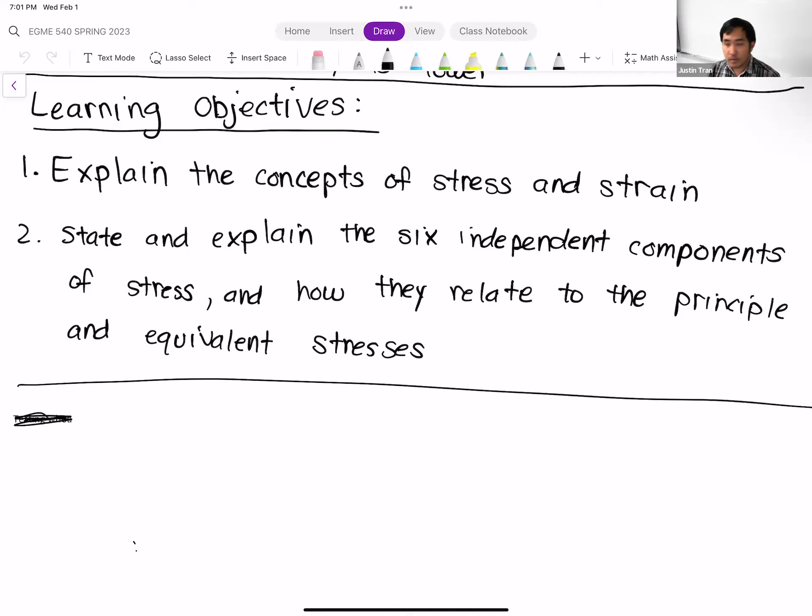Are there any questions I can answer about the activity or about anything before we get started for today? Okay, all right, so let's go ahead and get started. The topic for today is a strength of materials review.

Strength of materials, if you did your undergraduate in mechanical engineering, you most definitely took a course in this. If I could sum up strength of materials in one word, it's basically the theory, or the concepts of how objects and structures mechanically deform when they're exposed to physical loads.

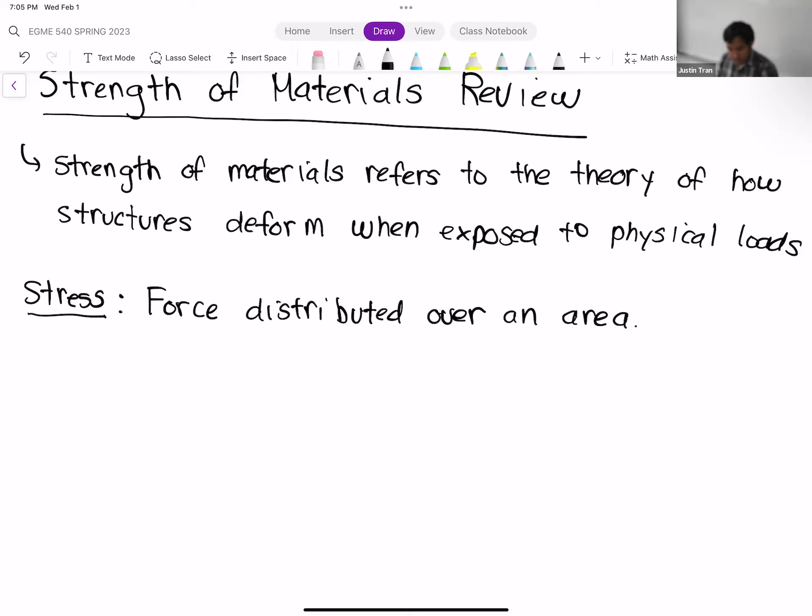Its pure definition for stress is basically a force that's distributed over an area. A lot of times we may have a structure - we have an arbitrary potato here - and a stress may be a force that's being applied to that area. The units of stress, just like its definition implies, is a force divided by an area.

In SI units, the SI unit for force is a Newton, and the SI unit for area is meter squared. So this has units of Pascal - that is the SI unit for pressure, or rather the SI unit for stress. In English units, often we use pound per inch squared.

English units: pound per inch squared, oftentimes reported as PSI, where PSI stands for pounds per square inch.

You might see variations on this. For the SI unit, 1 Pascal is very, very small, so you may see it in terms of kilopascals (kPa) or megapascals (MPa), and so on.

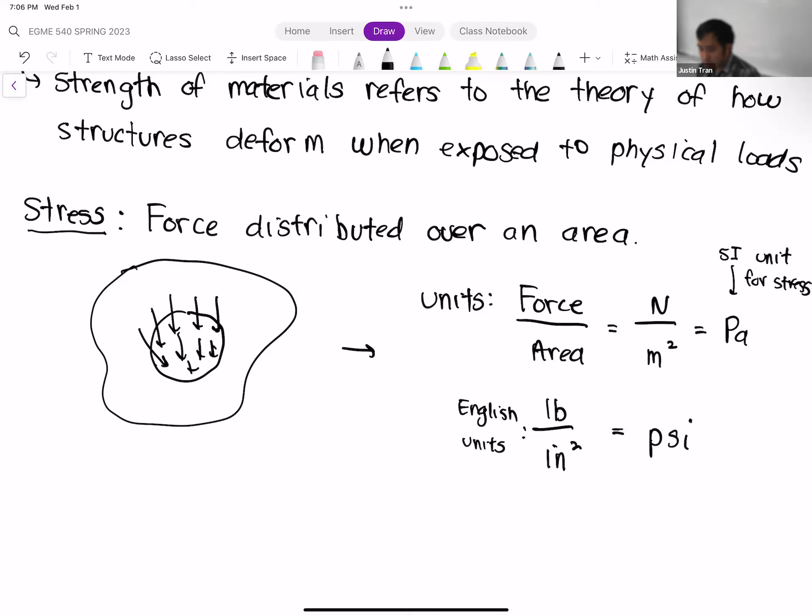If you're familiar with fluid mechanics, you'll recognize right away that the units for stress are exactly the same as the units for pressure.

So you may be wondering, why do we have two different names for it? Why do we have pressure and stress if they have the exact same units? Well, it's true they have the same units, but the way we interpret them is a little bit different. There's just a nuance in how you use those terms.

Oftentimes when we use the term pressure, we refer to something active—something is exerting a pressure.

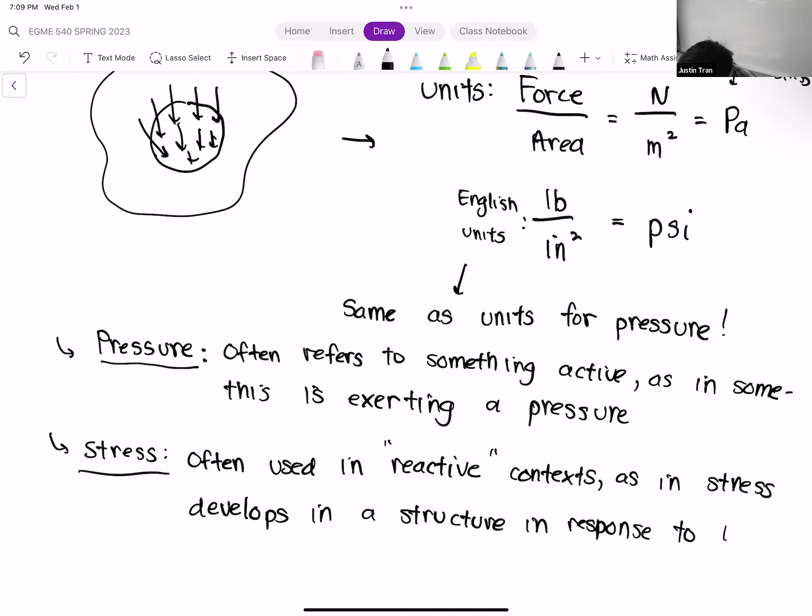Even though pressure and stress often have the same units, we use them in slightly different contexts. You'll never hear people say, talking about a structural beam, that pressure developed inside the beam—that's not quite right. We say that stress develops in the beam.

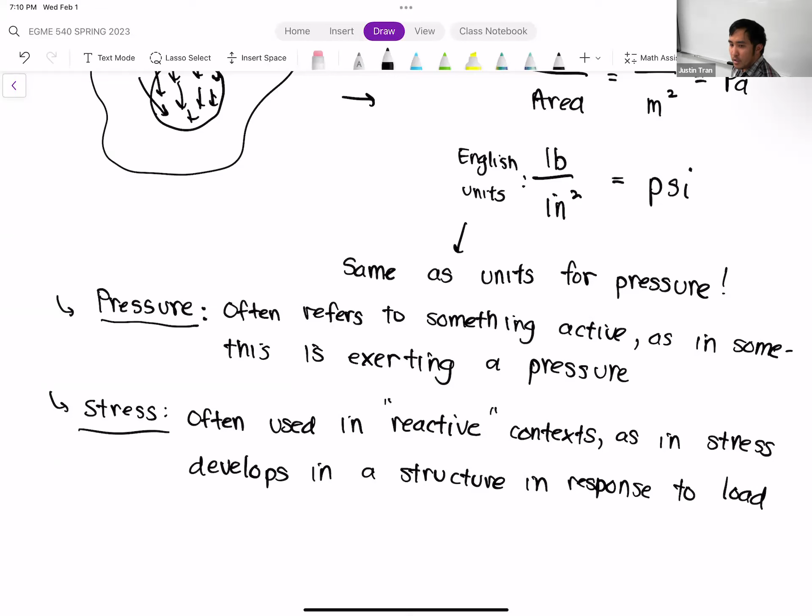When you're talking about forces, sometimes you might use the term stress—you can say something's applying a shear stress onto an object—but most of the time people use pressure in that context. There are more differences between the two, but I wanted to highlight the more common ones here.

Any questions on this? Based on these definitions, you can see what stress is in the context we're using. Oftentimes we say that stress develops inside a structure in response to a physical load.

The reason this happens is that, if you think about our ANSYS simulations in particular, the stress develops inside the structures to maintain a sense of equilibrium—basically static equilibrium.

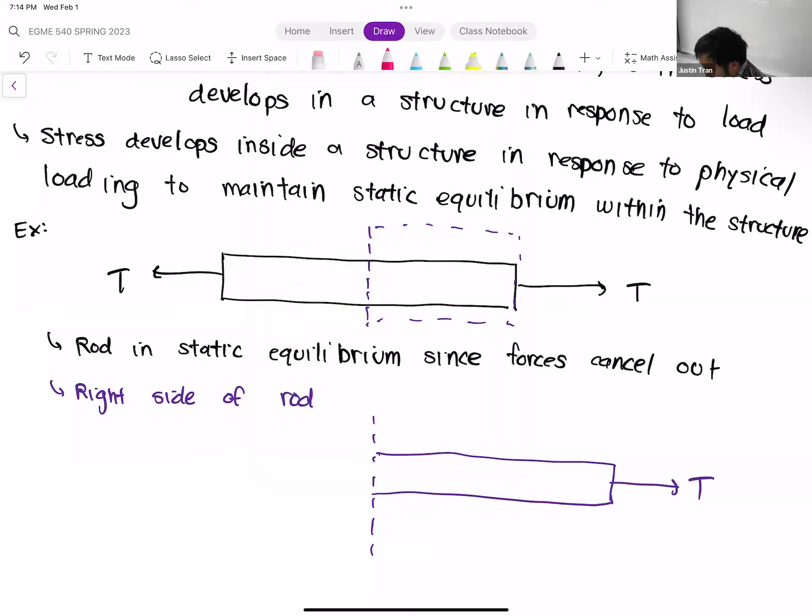The way I've drawn this, there's no way for this rod to be in equilibrium, because the other opposing force is applied on the other side. This implies that on the inside of this rod, there is an opposing internal force that has to oppose that external force.

That internal force, the way that we often describe it, is as being distributed on the interior of the structure. And oftentimes we talk about this force as an internal stress.

The symbol that we give for stress is often the sigma symbol. And this internal stress that must develop has to have a value such that it opposes that external force T.

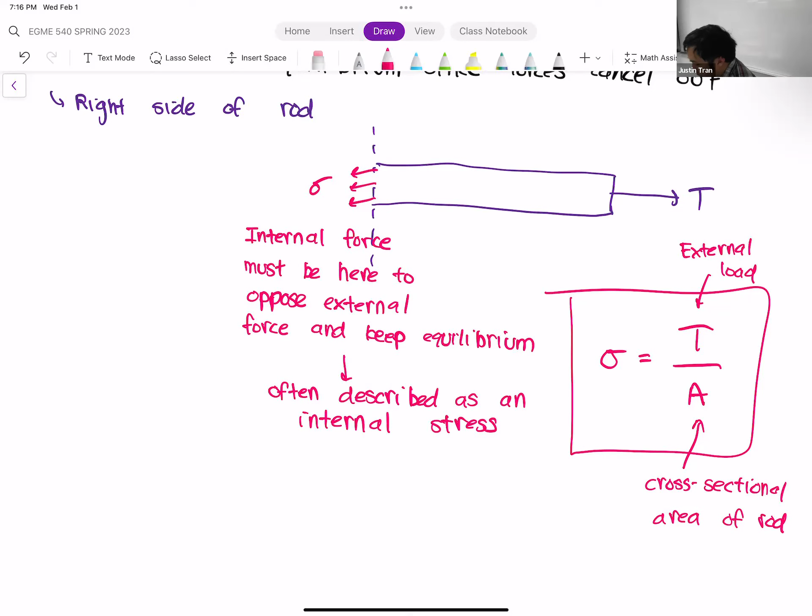So what we say is that internally in the rod, we have an internal stress whose value is T over A. Because if you take the stress and multiply it by A, sigma times A, going back to the formula, that sigma times A is going to be equal to T. So the total amount of force used to oppose the external force has a value of T, and so we have T canceling out with T, and then we have static equilibrium again. So this formula, very simple, but this is kind of the concept of stress in a one-dimensional environment.

Questions on this so far?

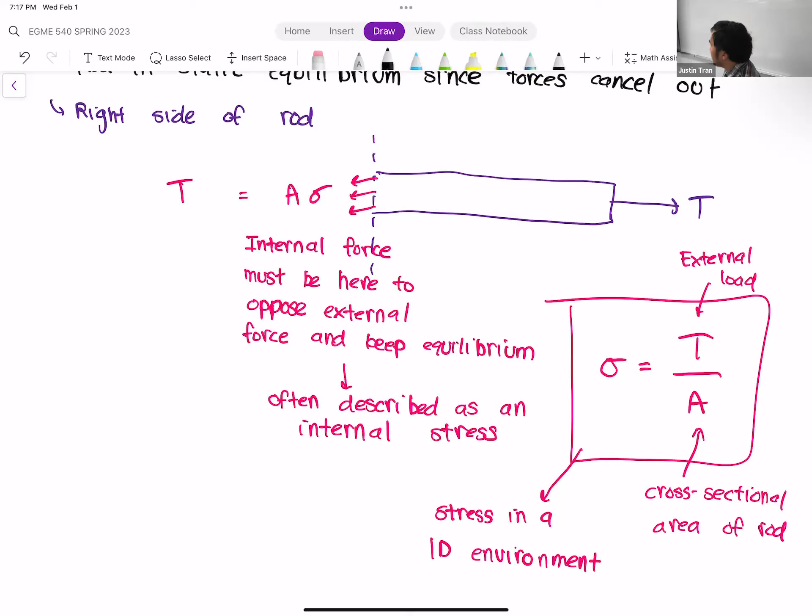And so, of course, in one dimension we can come up with a very easy, very simple formula for stress like this. Once you start getting into 2D and 3D and complicated geometries, the equation for stress becomes a lot more complicated.

We don't really have straightforward formulas that can compute stress in those kinds of geometries. But that's the reason we have FEA, right? We want to know these stresses because they lead to a lot of other things we'll talk about, like failure and strains. But we don't have a straightforward formula to compute it. So one of the big benefits of FEA is that we can compute these internal stresses, these internal forces, without having to do very expensive and very complicated experiments.

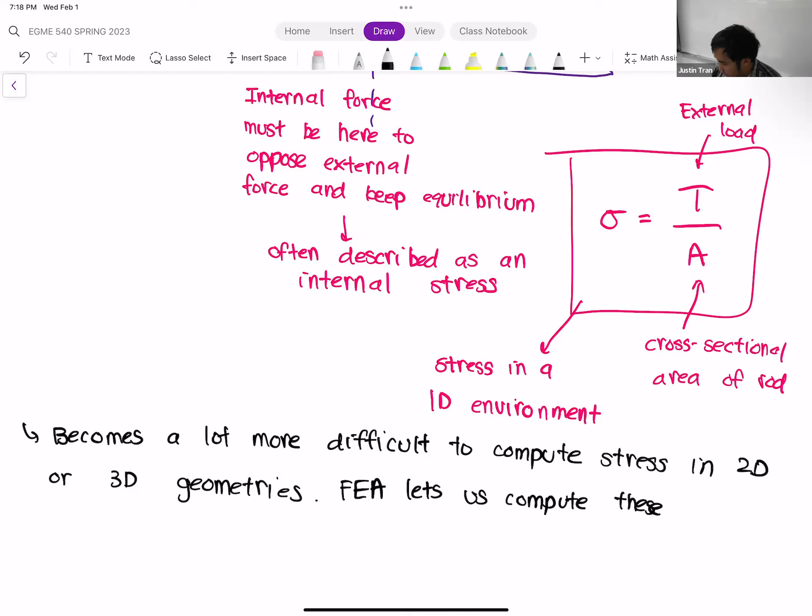All right, so that's kind of the concept of stress. That's one thing we're very interested in, because even in a one-dimensional case, even if I took my Apple Pencil right here and pulled on it, that would still be very hard to measure the stress. So stress analysis is one of the primary benefits of doing FEA.

All right, so let's expand on this idea of stress a bit more. The way I drew it here, the stress looks like it's directly opposing that tension, but stress is actually a multi-directional phenomenon. You can have stresses that go in multiple directions.

And in fact, if you were to mathematically describe stress in a three-dimensional object, it's not just a vector quantity. Normally when we think of things occurring in multiple directions, we think of them as a vector quantity, right, X, Y, Z components. Stress is actually a lot more complicated, because not only do we have the three directions, but we also have two different types of stresses as well, which we'll talk about soon. So to really fully describe stress in a three-dimensional object, you need what's called a tensor, and a tensor is just a fancy form for a matrix.

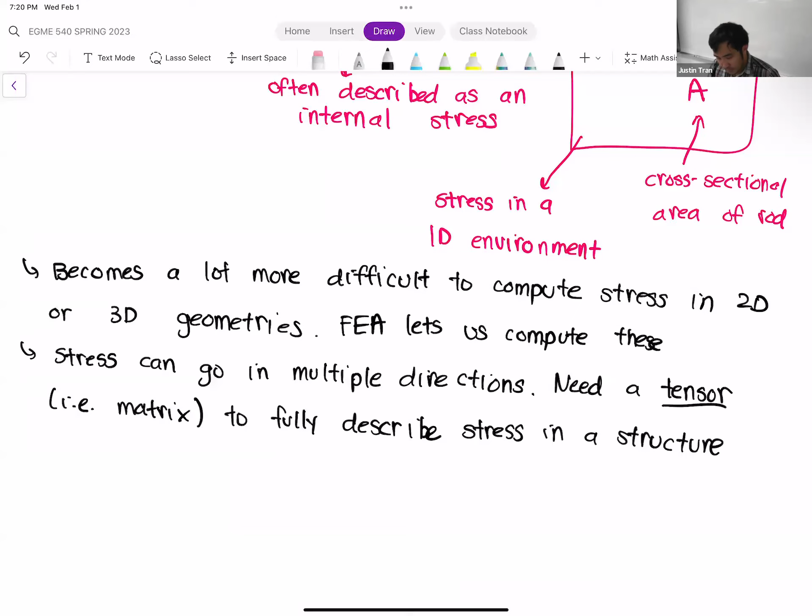And so if you were to mathematically write it out, it would look something like this. So you have stress. You won't see me use this much, since this is as mathematical as this class will get. But when I'm talking about a matrix or a tensor, I like to put an underline on it, so I do an arrow on top for a vector and an underline for a matrix.

So for a three-dimensional case, our stress tensor is 3 by 3. We have sigma xx, sigma yy, sigma zz. Off diagonals, we have tau xy, tau xz, tau yx, tau zx, tau yz, tau zy.

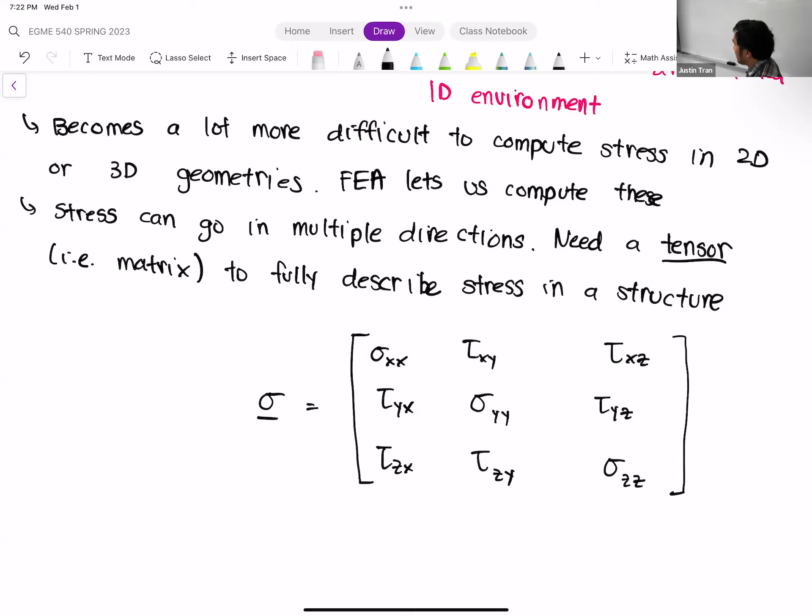You can see it's a lot, and there's a lot that we can describe here. So obviously, if you look at the terms in this matrix, you see X, Y, Z, and that should be one of the first things that stand out. So we have different values of stress based on what direction we're talking about. But you can see here that I've used different symbols as well. On the one hand, I have the sigmas, which is the same symbol for stress that we used before, but we also have all these taus. There's a reason why I gave these different symbols, because they represent different types of stress.

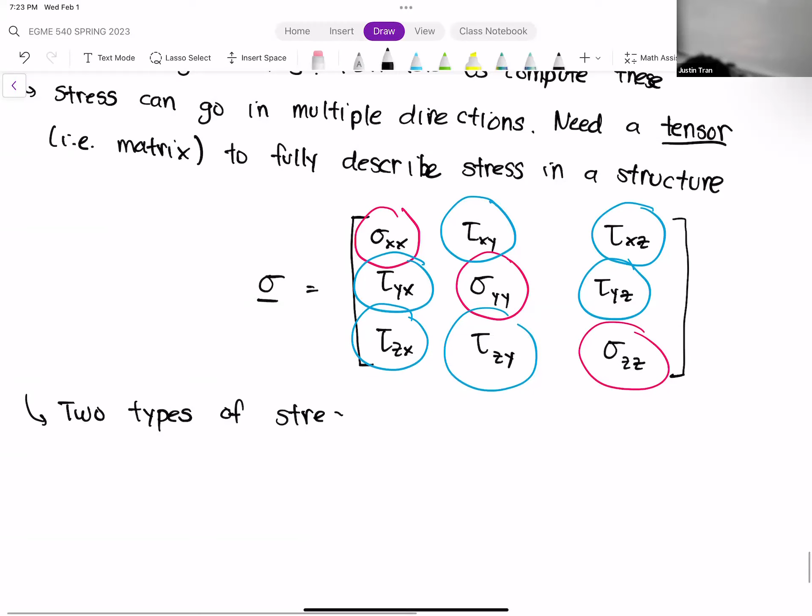So let's talk about the two different types of stress that we have. Okay, on the one hand, let's talk about the sigmas first.

And so the sigmas, I think, are kind of what people mostly associate with this idea of stress. We call those normal stresses. So these are the sigma XX, sigma YY, sigma ZZ.

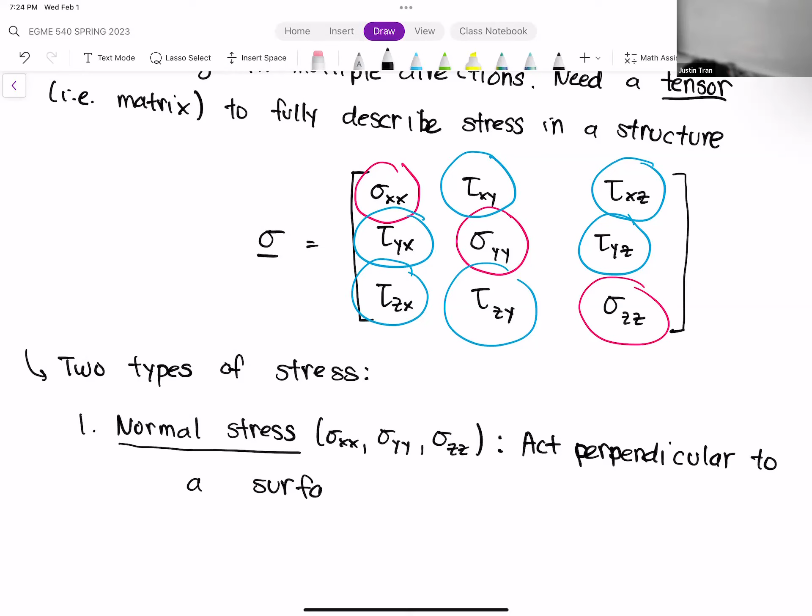And just like its name implies, the normal stresses are ones that act perpendicular to a surface. So visually, they look something like this. In fact, the example that we did above had normal stresses. If we use the dotted line as our surface that we're looking at the stresses for, then the normal stress would act perpendicular to that dotted line. I know I didn't draw those exactly straight, but those purple lines are perpendicular to the dotted line.

All right, the other type of stress that we have are the shear stresses. All the tau symbols are this, so we have tau xy, tau xz, tau yz, etc. The shear stresses are different in that they act parallel to the surface.

So let me go ahead and draw the same thing that we have here. And so the shear stresses, instead of acting perpendicular to that dotted line, it's going to be parallel to it instead. Any questions on this so far?

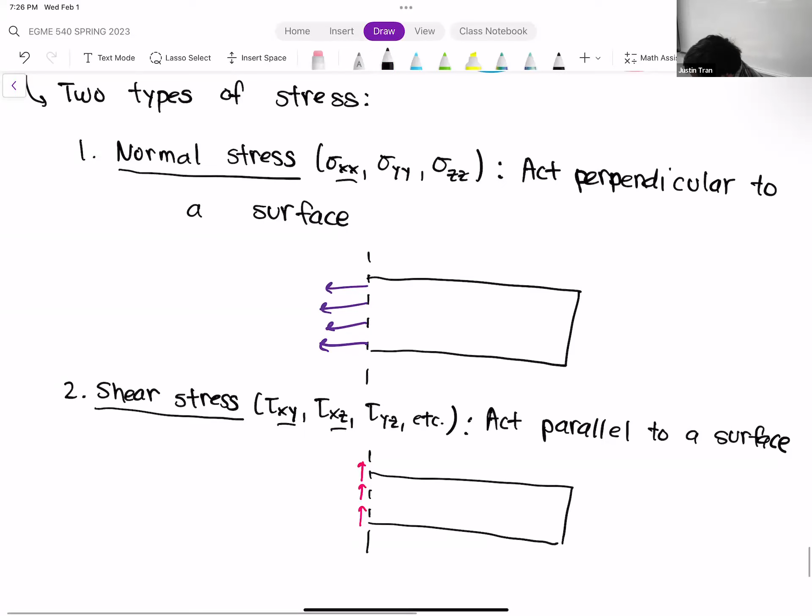So you may be wondering, why, if we have normal stresses and shear stresses, why do we have a double lettering here for the directions? The reason we have the double lettering is that it tells you two pieces of information.

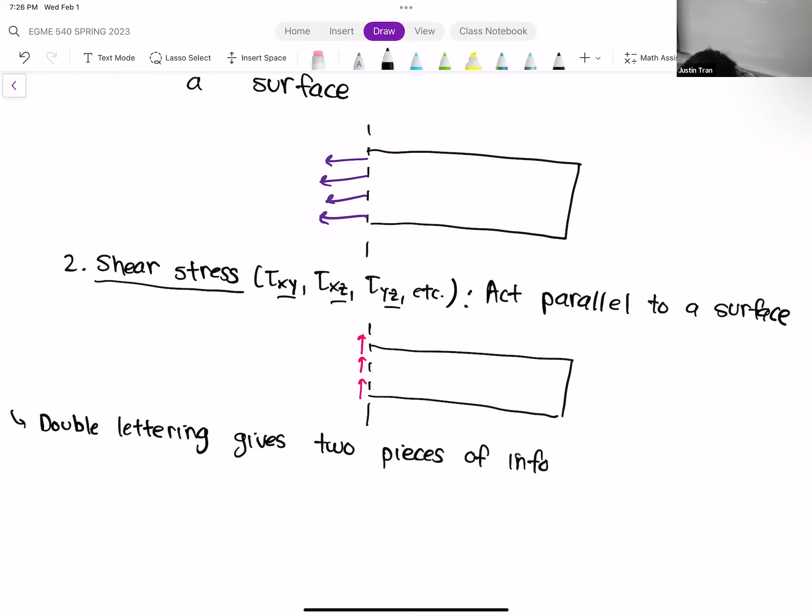And so the first letter tells you which face the stress is acting on, whereas the second letter, the second coordinate, tells you the direction of the stress itself.

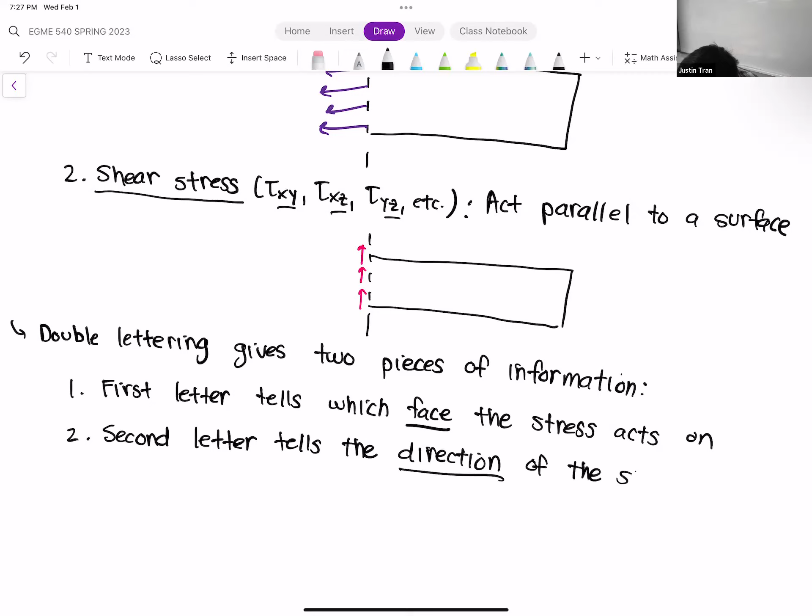All right, let me show you what I mean. Oftentimes when you're talking about stresses in a structure or even a fluid too, if you've taken an advanced course, or even covered in undergrad, in structural mechanics or fluid mechanics, you might be familiar with this figure that I'm about to draw. I don't like drawing it usually because it ends up being kind of a mess, but it's useful to illustrate what's going on.

All right, so we have a cube here. Imagine that this cube is an infinitesimally small cube in a structure, and we're going to use this cube to show you where all the different stress components are acting. So let me draw my coordinate axes here.

And so the x direction we'll say is going to go horizontally from left to right on the page. The y direction is going to go vertically from bottom to up on the page. And the z direction is coming out of the page and going towards you.

All right, and so when I talk about which face the stress acts on, it basically tells you which face on this cube the stress is acting on. And so this face right here, the one that's facing to the right, we call that the X face because if you imagine the face as like a person's face, it's facing in the X direction.

The top part of the box, or the top surface of the box, that is the Y face because that faces in the positive Y direction. And the one that's facing right to us, that's the Z face because that's facing in the Z direction. Okay, and then on each of these faces, we have all the components of the stress.

Oh, really? I see. Well, it's also the second time you're hearing it, so I have the benefit of, usually the second time you hear something, it's easier to understand.

All right, and so for the X face, we have three components of the stress. So we have stress in the X direction, and that's sigma XX. Remember, the normal stresses act perpendicular to a face, and so sigma XX is the force on the X face in the X direction. So that's why it's that one.

Then we have tau XY. So tau xy is a shear stress that's on the x face that goes in the y direction. So it's parallel to that x face.

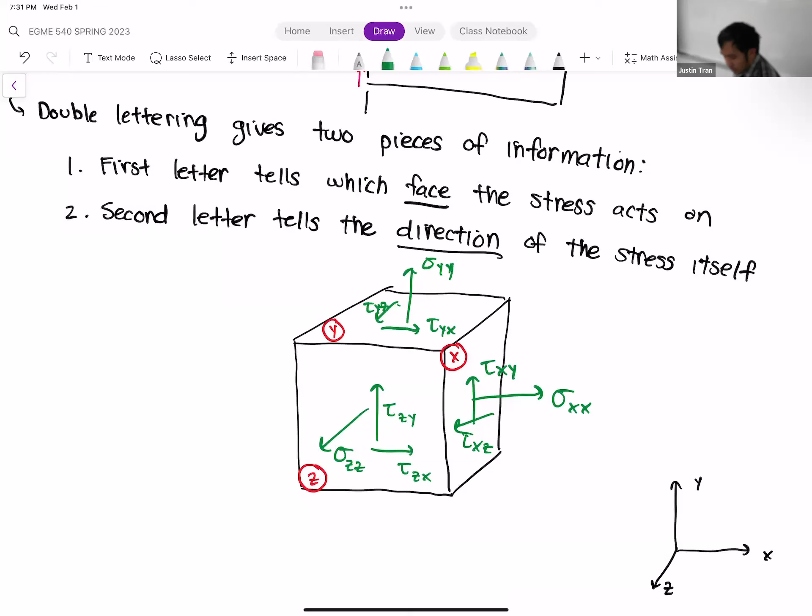All right, any questions on this? Okay, so that's stresses.

So stress is pretty complicated. So when we talk about stresses in a structure, there's a lot to keep in mind. But at the same time, stress is something that is very interesting. And if you're doing structural FEAs, stress is what you're aiming to get, and that's what you want. But as you can see here, with the 9 components of stress, it gets to be pretty complicated.

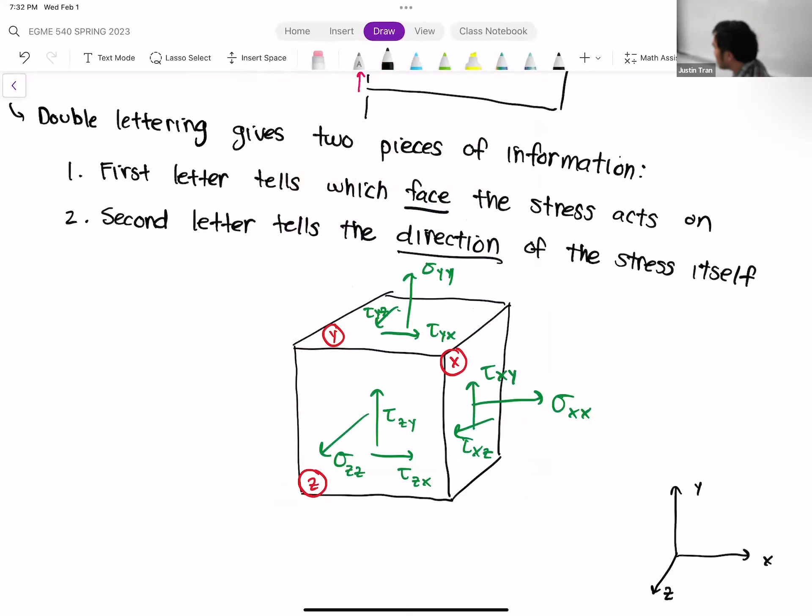And so when you talk about just stress, you have to ask, are you talking about normal stresses? Are you talking about shear stresses? Which direction are the stresses going to go? And so usually just by itself, stress, because stress is so complicated, it becomes kind of hard to talk about stresses in a structure.

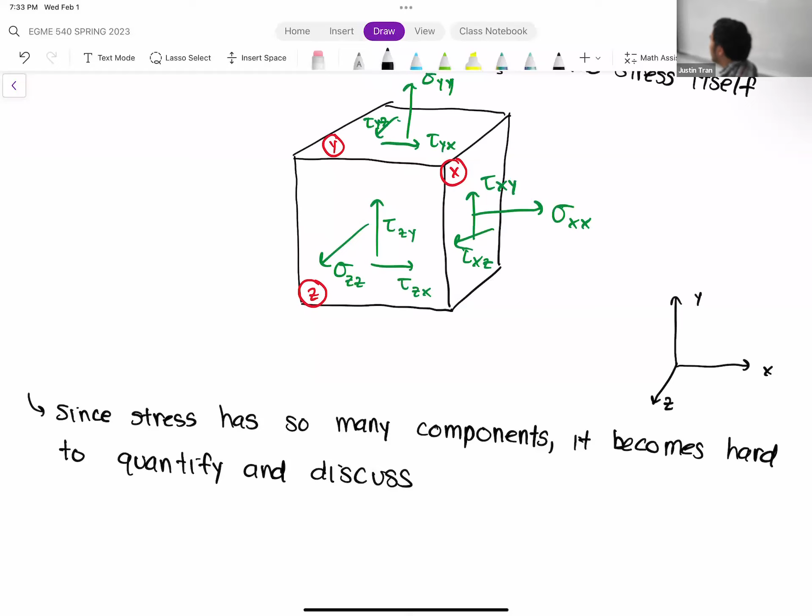So oftentimes, when you talk about stresses, specifically stresses from a finite element simulation, remember finite element simulations, we're often doing these on very complicated geometries. And so we're looking at a complicated geometry and this complicated idea of stress, which makes it even more difficult. And so instead of talking about the individual stress components, oftentimes we like to come up with other measures of stress that are more easy to interpret.

All right, and so this is where the concept of an equivalent stress and a principal stress come into play. Equivalent and principal stress, they're computed based on the same stress tensor, and so all the components of stress are there. It's just that we kind of run it through an additional layer of processing just to make it easier to interpret.

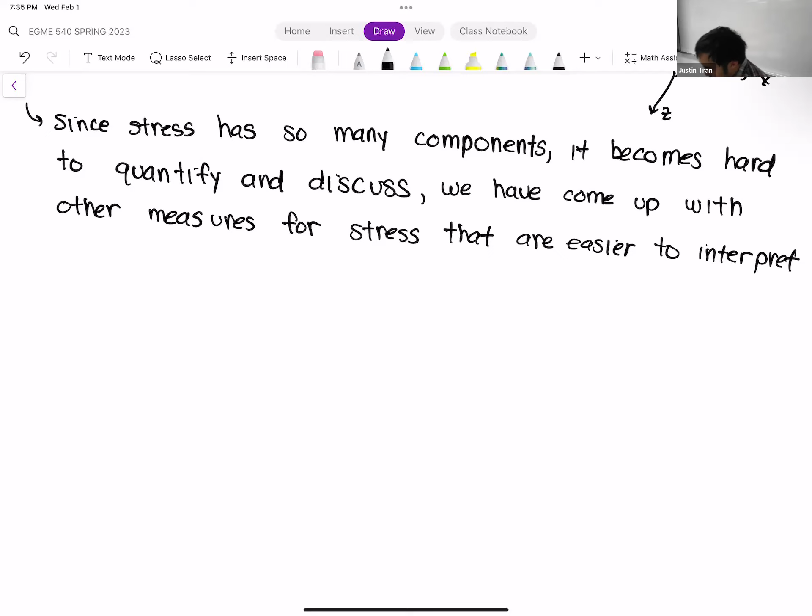Okay, and so, of course, there are more interpretations of stress out there. So there's not just equivalent stress and principal stress. It's just that these are kind of the more common ones, so these are the ones that we talk about a lot in this class. Okay, so let's talk about equivalent stress first.

And so I think in ANSYS it calls it the von Mises stress. Still don't know if that's how you actually pronounce his name, because I've heard equal amounts of people say von Mises, and so, I don't know, maybe we'll dig up, or maybe when I die and go to heaven, I'll ask what's the proper way to pronounce his name.

Okay, and so the idea about the von Mises stress is that it takes this complicated tensor for stress and turns it into a scalar value, because oftentimes it's a lot easier to think about scalar values when you're comparing things. You can almost think of it as the same way as taking the magnitude of a vector.

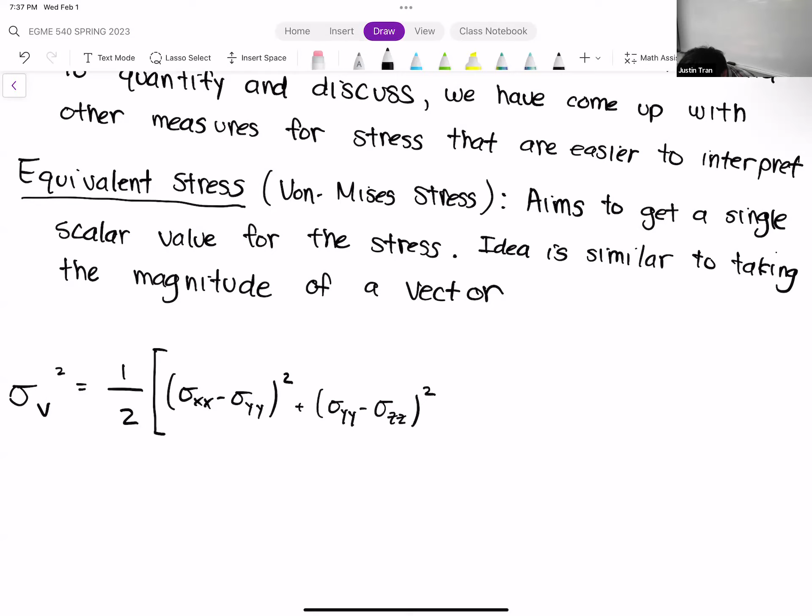Okay, so the formula for this is 1/2, and then we multiply this by the quantity sigma xx minus sigma yy, quantity squared, plus sigma yy minus sigma zz, quantity squared, plus sigma zz minus sigma xx, quantity squared, plus 6 times tau xy squared plus tau xz squared plus tau yz squared.

Six. Yes, that's 6 right here. So like literally the number 6.

All right, so if you look at this formula, you can see that it takes basically all the stress components into consideration. Okay, so of course here you have all the normal stresses, and here you have the shear stresses. You may look at this and say, hey, we only have half the shear stresses, right? There should be 6 of them, but I only see 3 in this formula here.

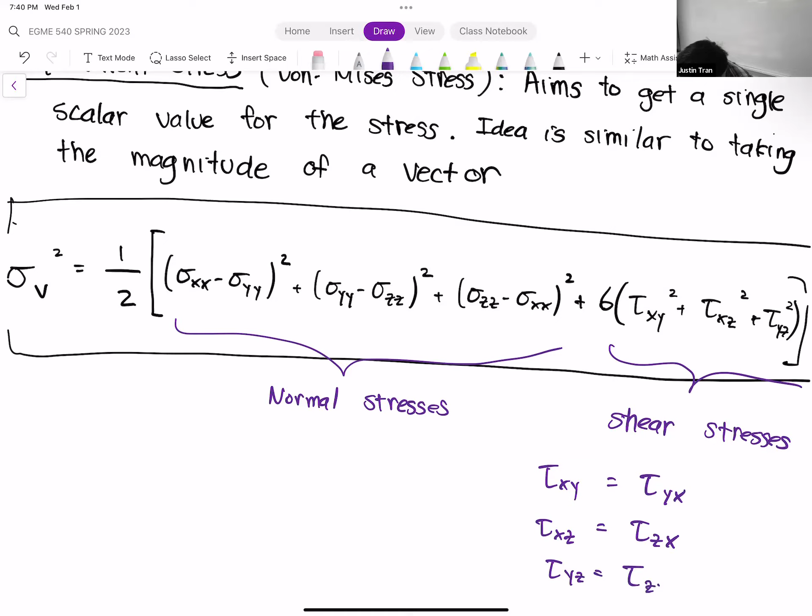The reason for that is that the stress tensor is a symmetric tensor. And so if you kind of swap the letters, then you end up with the same thing. So tau xy is equal to tau yx, tau xz is equal to tau zx, and tau yz is equal to tau zy. These are basically saying the stress tensor is symmetric.

So that's why it may seem like there's only half of the shear stresses represented in this formula. The reason for that is just that it's symmetric, and so you really only need just one of them, and then you just multiply it by 2, basically. So that's where the 6 kind of comes from.

All right, so the von Mises stress, very, very popular. I would say this is the one I kind of see the most because it's a scalar representation, and it's kind of easy to interpret.

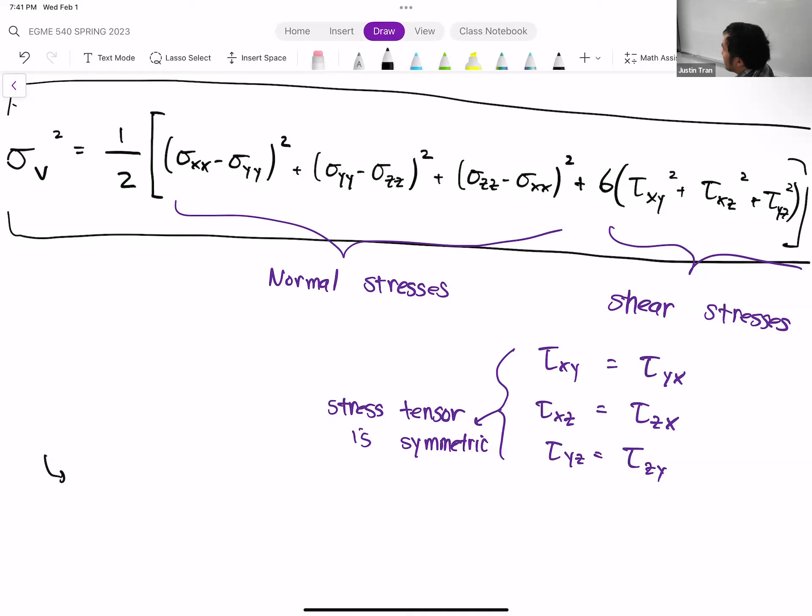And so, if you look at this formula here, you can almost think of it as the magnitude of stress. You take all the components together, you get one number, and that's just how much stress it's feeling. There's been a lot of theory built around this idea of von Mises stress, and one thing we'll use a lot in this class is failure testing for material failure.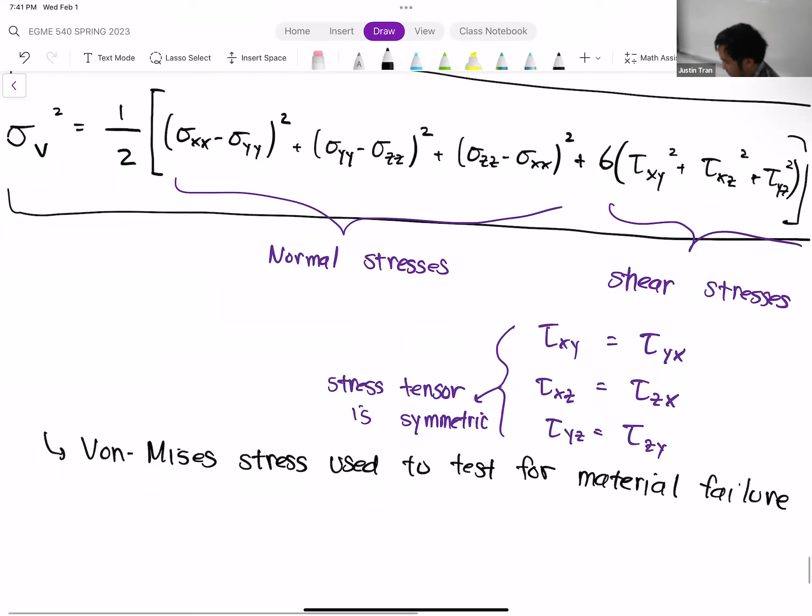And you'll see this in activity 2, a week from today. A lot of times, when you look at the material data sheet for a material, let's say aluminum, steel, or something like that, they often will report something called a yield strength, or a strength of a material.

And so the idea with the yield strength is, if you look at the units, the units for yield strength are the same as stress, given in Pascal, megapascal, PSI, things like that. And so the idea with the yield strength is that if the von Mises stress in the material exceeds this yield strength, then the material will start to break.

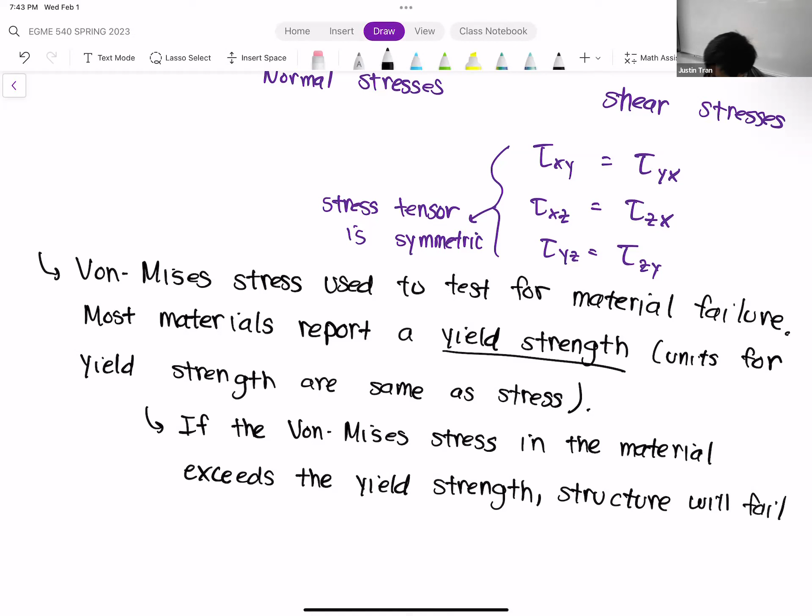So that's known as the von Mises failure criterion.

It's not always going to be as straightforward as this. Sometimes if you look up a material, they'll have different yield strengths that they report. They may have a compressive yield strength, a tensile yield strength, or a shear yield strength. In those cases, you'd have to look at the individual normal stresses and shear stresses to determine that. But oftentimes, if you look up a material and it just gives you one number, one yield strength, you're meant to compare that to the von Mises stress, which is a scalar representation of that stress.

And so in activity 2, I'll give you a short preview: we're basically going to be testing for failure in a bike crank geometry.

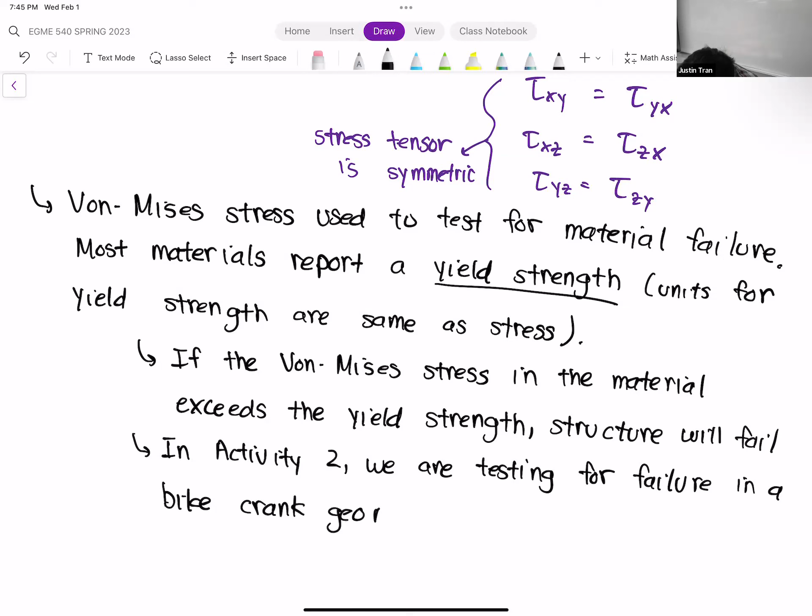Basically what we're going to do is I'm going to give you a CAD file for a bike crank, the thing that connects to the pedal, kind of a rod. We're going to apply a load onto that bike crank, measure the von Mises stress, and see if that exceeds the yield strength of that material.

Okay. Any questions on this?

All right, so that's von Mises stress, and again, just think of it as a scalar representation of all the stress components. The other concept of stress that we're going to discuss is principal stresses.

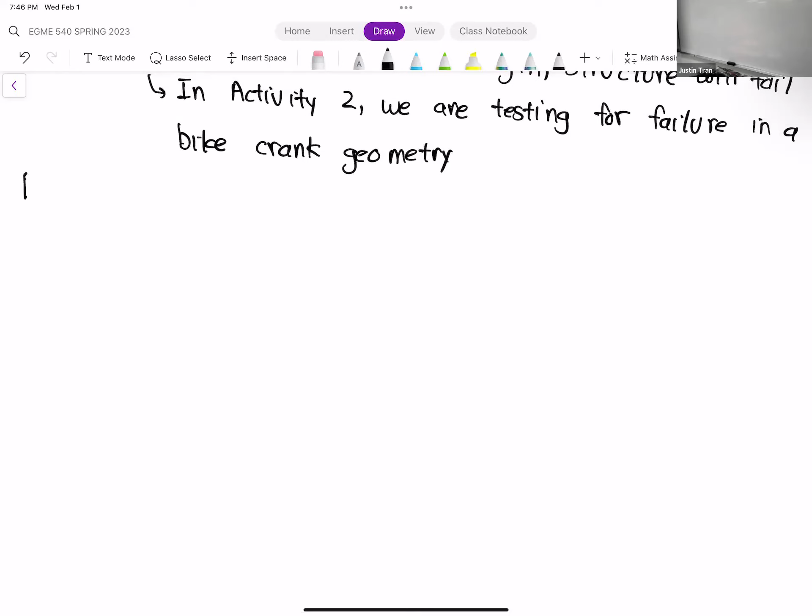So the idea with principal stresses is, the motivation is similar to the von Mises stress, where we want to simplify our interpretation of the stress. It's just that the way we achieve it for the principal stresses is a little bit different.

So for principal stresses, what people were saying is that this idea of a stress tensor having 9 components of stress, 6 unique components, is too many components to keep track of. Instead of transforming the state of stress into a scalar, principal stress aims to turn the interpretation into a vector instead.

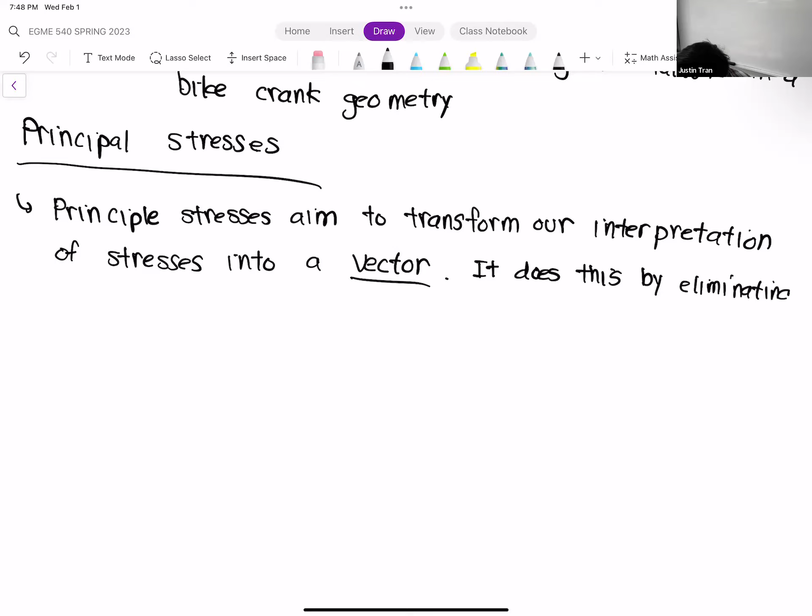So how does it do that? If you have a normal situation, I'm going to do a 2D case here so it's easier to draw. If you have a two-dimensional square, normally we have the normal stresses: sigma yy, sigma xx.

Then we have the shear stresses: tau xy, tau yx, tau xy.

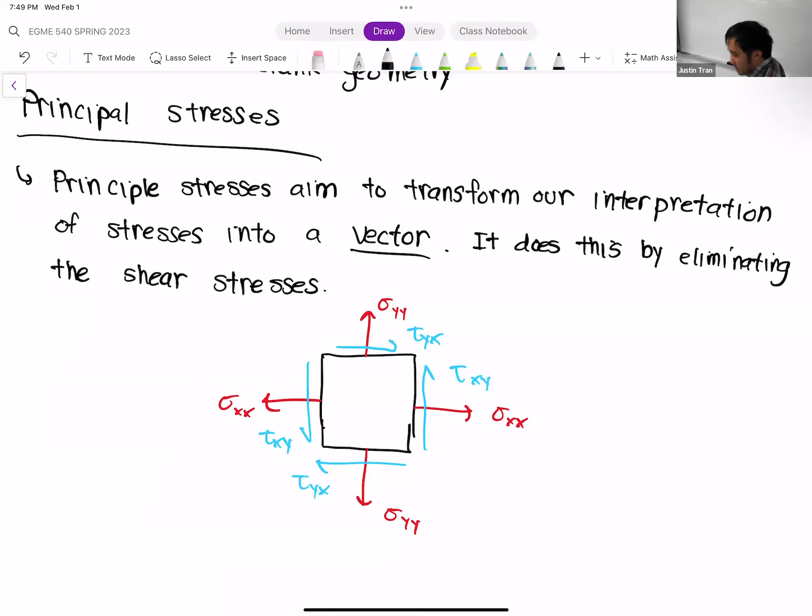What some people noticed, I think it was a math person, because otherwise it'd be really hard to determine this, is that when you have a complicated stress situation with both normal and shear stresses, what you can do is perform a change of coordinates. Instead of looking at this square as being lined up with the x and y axis, we can rotate the square.

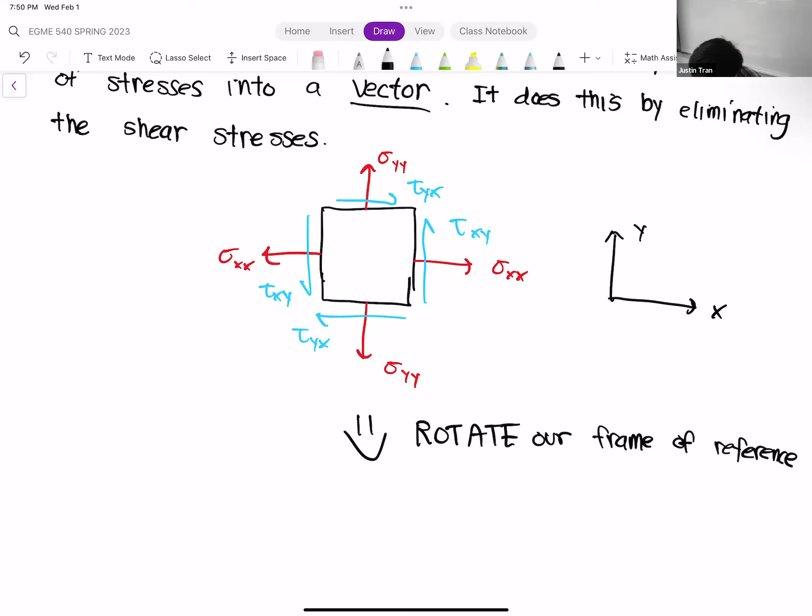So instead of the x and y components being like this, you rotate it so that the x and y coordinates are in a different direction. We'll call it x prime, y prime. And then our square is going to be like that as well.

So why would you do this? Why would you rotate your frame of reference? The idea with the principal stress is that if you rotate your frame of reference in a very specific way, you can get it so that your shear stresses are basically zero, and you change the interpretation of the stress to be only normal stresses.

It's important to stress here that by doing this rotation, we're not introducing stress or taking stress away. The overall magnitude of the stress is still the same. It's just that we're changing our perspective, rotating it a bit to make it align more conveniently in terms of computations.

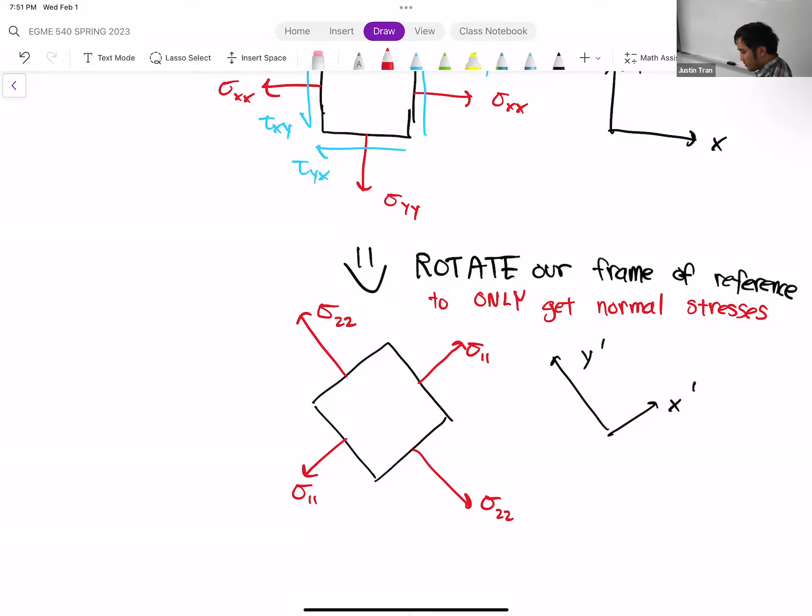If you took the von Mises stress of the top configuration and the bottom one, you should get exactly the same thing. We're just shifting the numbers around and shifting the coordinate axes so that we get it to only this normal state.

So this state right here is really nice, because now if you think of a three-dimensional situation, you only have three components of the principal stresses.

So what do we call these three components? We call them literally the maximum principal stress, the minimum principal stress, and the middle principal stress.

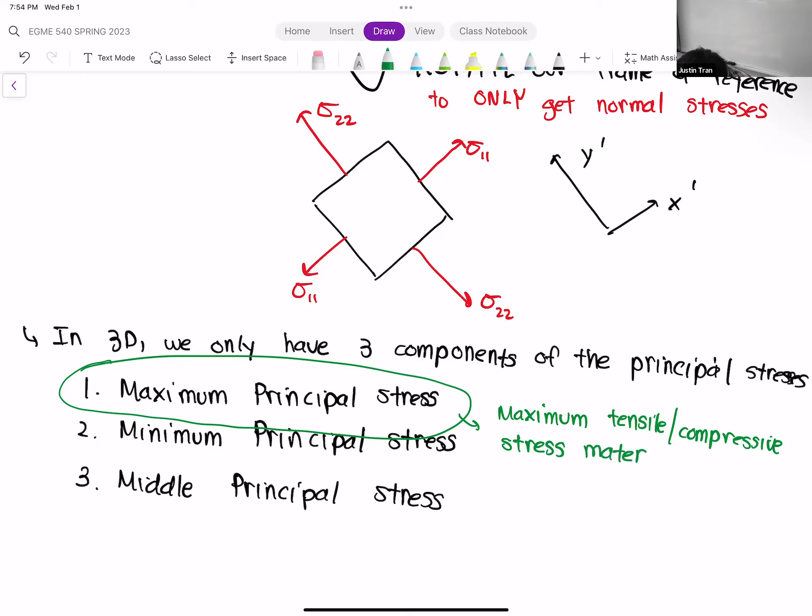This is useful for testing if your material is going to fail, because sometimes when you read a material data sheet, you're given things like the maximum tensile strength or maximum compressive strength. In those cases, it may be useful to compute the maximum principal stress and compare that to the tensile or compressive strength.

This is another really nice feature in ANSYS. Just as trivia, in order to compute this rotation angle and the directions of the principal stresses, that's normally very computationally intensive. You have to solve what's called an eigenvalue problem at each location within your solid, which is very difficult. If you've taken an advanced math course and know a bit about eigenvalues, they are a pain to compute. So it's really nice that ANSYS computes these for you.

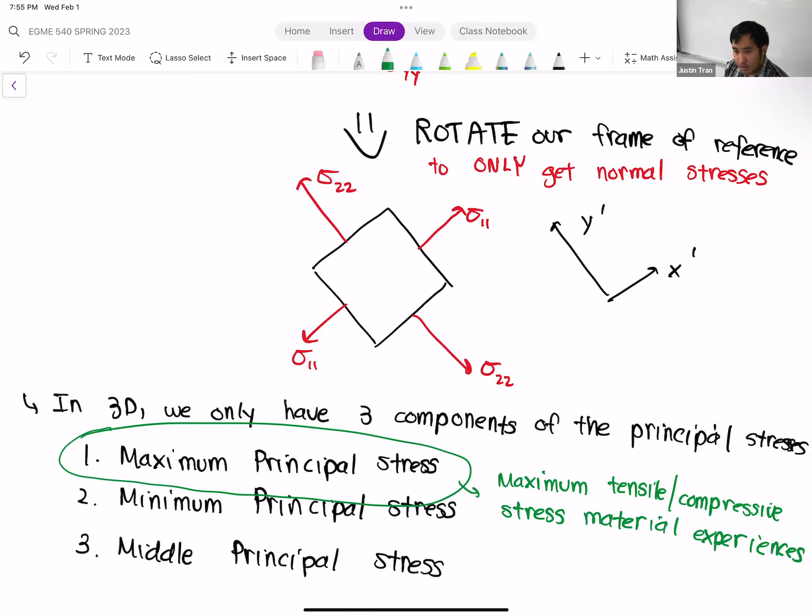It gives you this information basically for free. Any questions on this? Okay, so that's the concept of stresses, and hopefully that gives a little more context in terms of what we're getting out of our ANSYS simulations.

The last thing I want to talk about today is this idea of strain, what strain is, and then how stress and strain are related in a material. So what is strain? Strain is a measure of the amount of deformation, the amount of relative deformation that a structure will undergo.

So you have a structure, you expose it to some loads, to some constraints, it deforms. One way that you can describe the deformation is in terms of strain. Strain is unitless, it doesn't have any units.

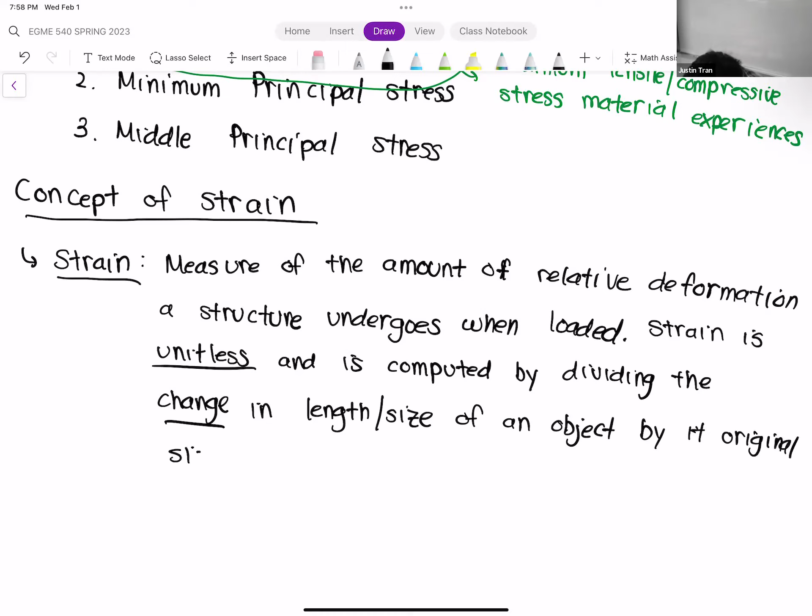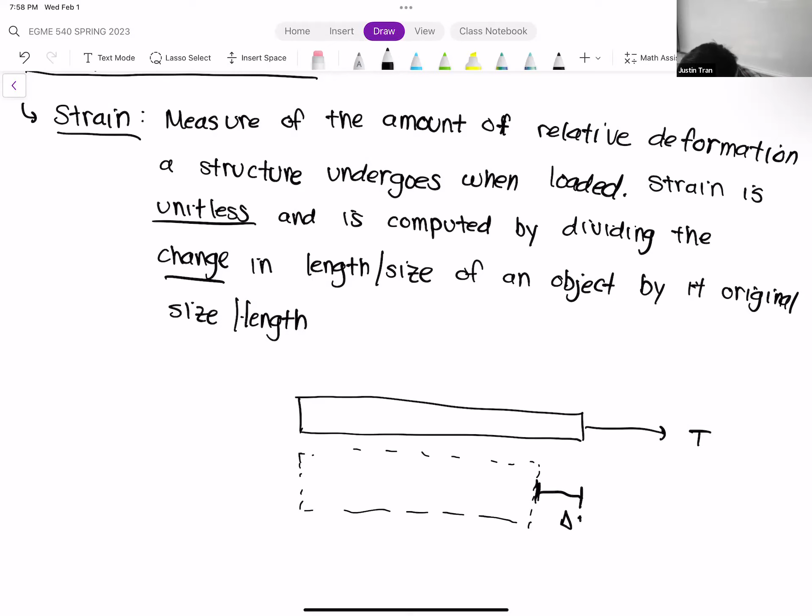In 1D is kind of the most traditional way that it's computed. We have a rod, let's say we're pulling on it with tension T. The original rod may be this length. This distance right here is the change in length, so we'll call that delta L. If the original length of the rod was L, then the strain, which we often give the symbol epsilon, is just the ratio of the change in length, delta L, over L.

Fairly straightforward, you've probably seen strain a million times. But the reason I'm bringing strain up is that when you compute strain, the amount of strain you get is directly proportional to the amount of stress that's within the material as well.

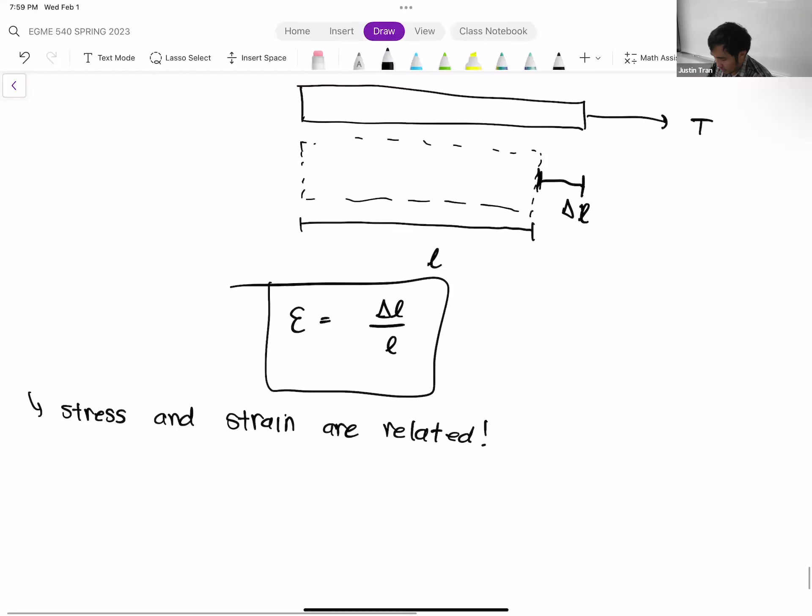In the simplest of cases, for a linear material, we have a linear relationship between stress and strain, and so we have this formula. Sometimes people call it Hooke's law: stress is equal to big E times the strain.

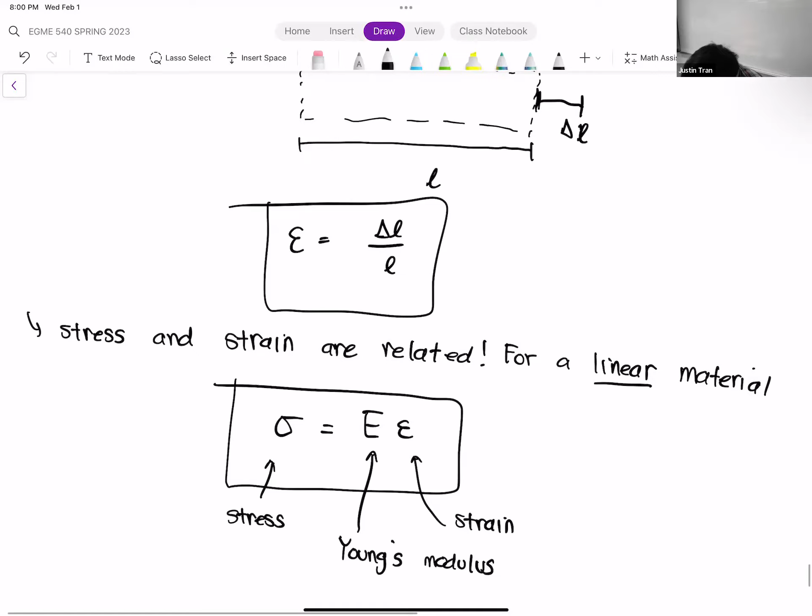This big E here is known as the Young's modulus. The Young's modulus is an important property of the material. We'll talk a lot more about material properties in a couple of weeks. But basically, the Young's modulus describes how stiff the material is, or how well the material can resist deformations when exposed to load.

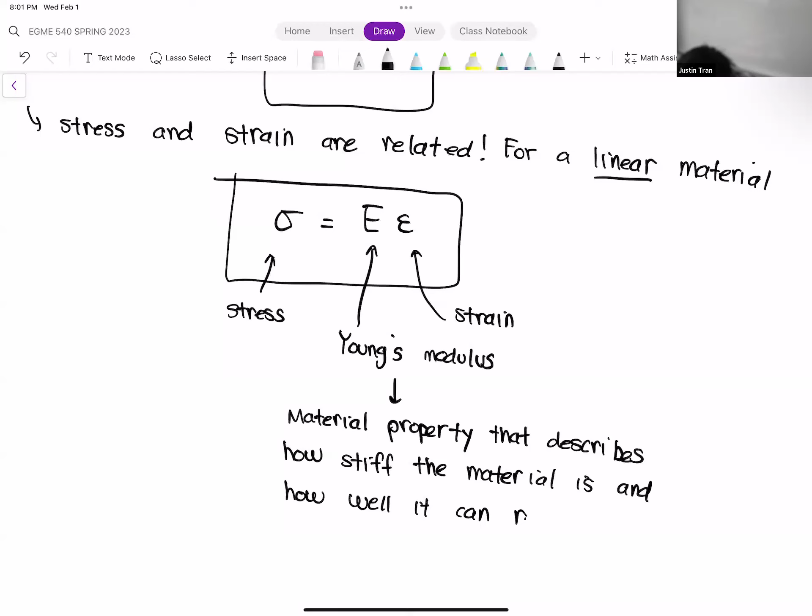Materials with a higher Young's modulus will resist deformations better. In other words, materials with higher Young's modulus will require a higher amount of load or force in order to cause it to deform.

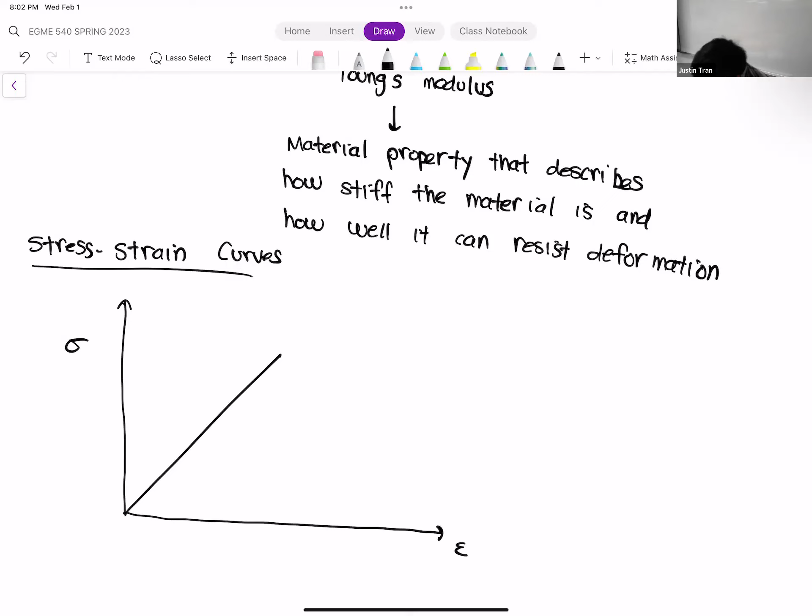For a linear material, we have a linear stress-strain curve. If you were to draw it, it would look something like this. The x-axis, or horizontal axis, is the strain, and on the vertical axis we have the stress. For a linear material, we have just a straight line where the stress and strain are linearly related, where the slope of this line is the Young's modulus.

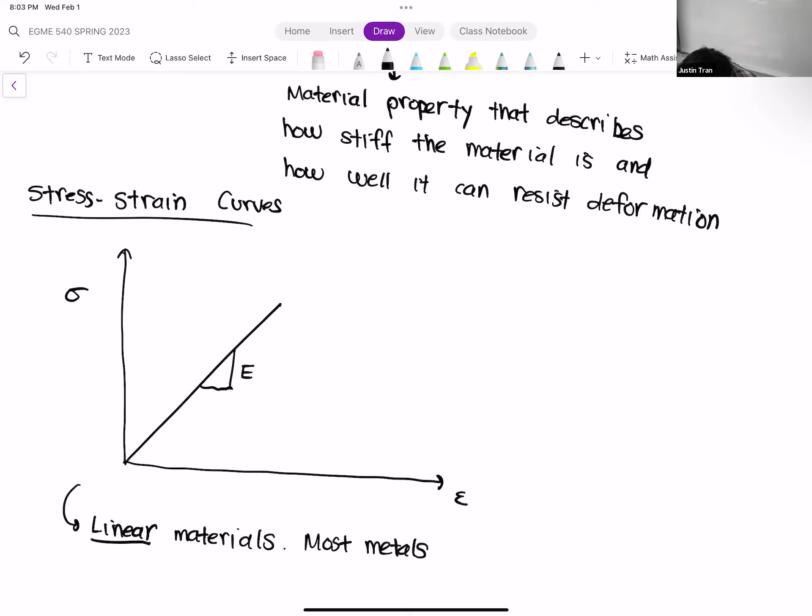This graph is only really valid for linear materials. You may ask, what's a linear material? We'll be discussing that a lot in this class. But basically, a linear material is one where the atomic structure of the material is pretty uniform, so most metals can be characterized as linear. Even for most materials, as long as the amount of deformation is relatively small, they exhibit fairly linear stress-strain behavior.

That begs the question of what happens when you move away from small deformations. For most materials, once you deform it to a certain extent, you reach the point where you start to deform it permanently. After the linear region, most materials have a region that looks like this, where the curve flattens out, and this region is called plastic deformation.

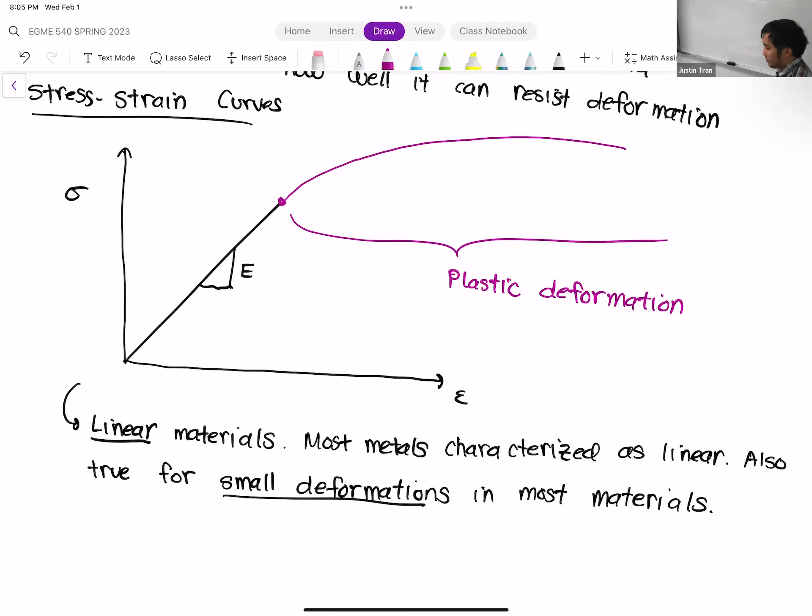This point right here, where it starts to transition between linear deformation and plastic deformation, this is often called the yield point.

We'll talk about plastic deformation a lot more later, especially when we discuss material models. Once you get past the yield point into plastic deformation, the material starts to permanently deform. With linear deformation, as long as you stay on the linear curve, releasing the load returns the material to its original shape. But once you get into plastic deformation, that deformation tends to persist, so releasing the load may still leave you on that part of the strain curve with no stress applied.

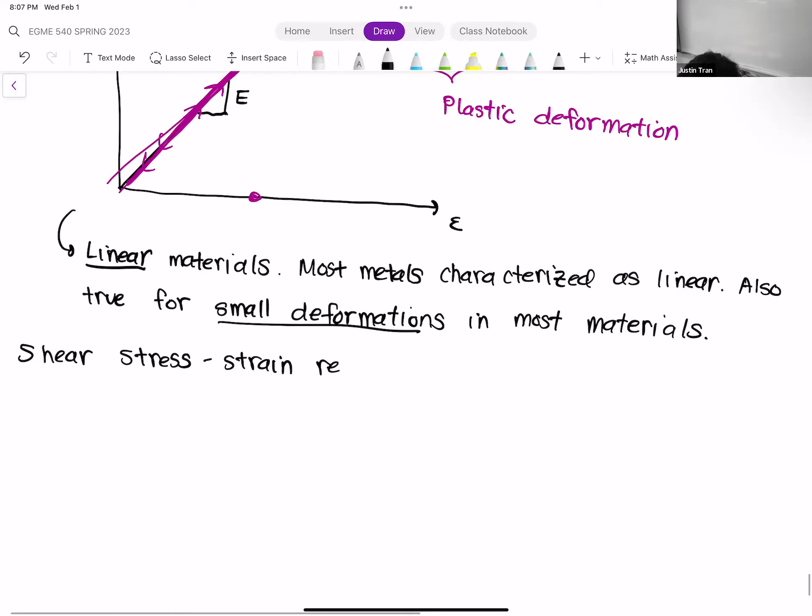The last thing I want to go over before we close up today is the relationship for shear deformations. What we just discussed was mostly for normal stresses and normal strain. For shear stresses, we have a similar relationship, again for a linear material.

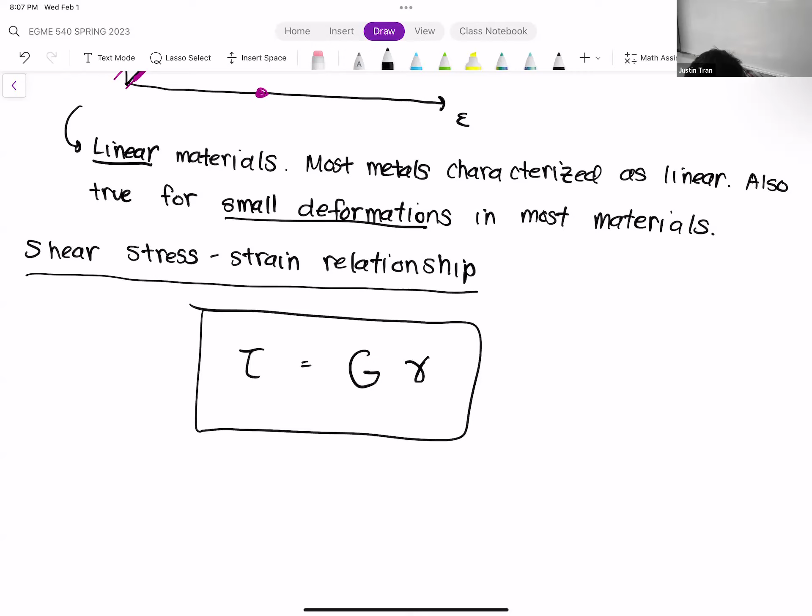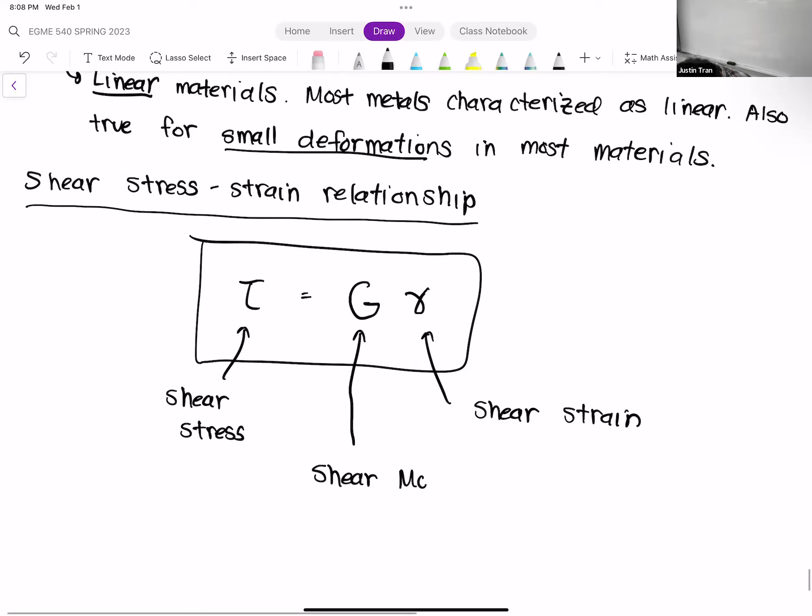Remember our symbol for shear stress is tau. We say this is equal to G multiplied by gamma, the shear strain. This G plays the same role as E, but instead of being the Young's modulus, this is known as the shear modulus. Just like the Young's modulus, the shear modulus is a measure of stiffness and strength of the material, but specifically it says how well the material resists shearing deformation and shearing stress.

The neat thing about the shear modulus is that if you have a purely linear material, you can actually compute it based on the Young's modulus. So the Young's modulus and shear modulus are not completely independent - they are related.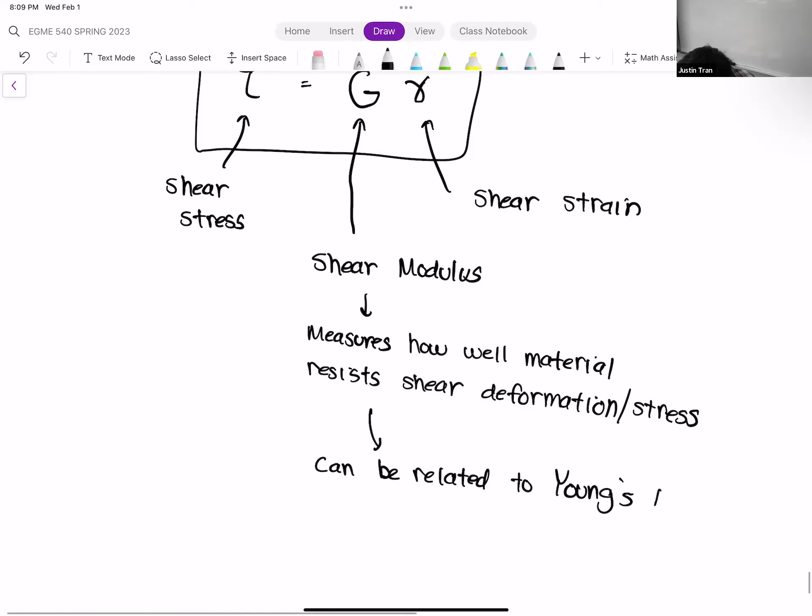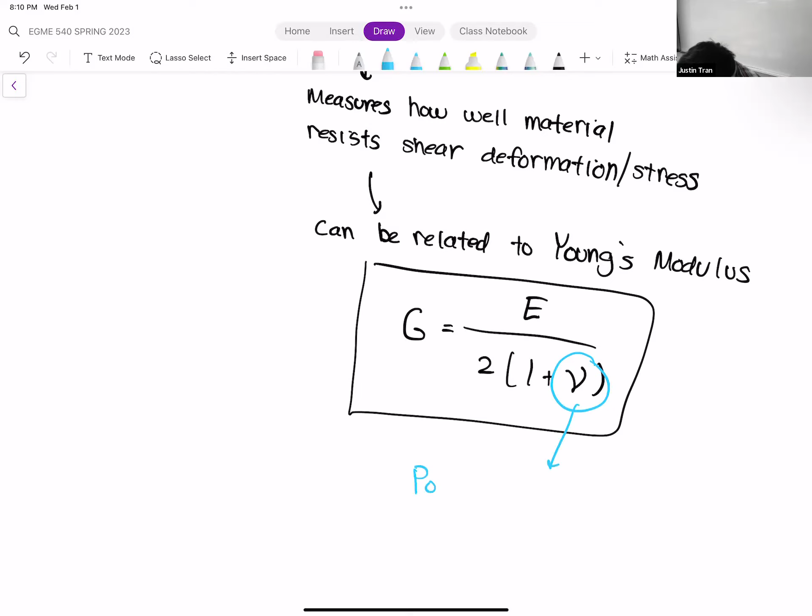The formula for that is G equals the Young's modulus E divided by 2 times 1 plus nu. Big E here is still the Young's modulus, but the new parameter, nu, is known as the Poisson's ratio. The Poisson's ratio is another important material property - it measures how much a material is going to deform in directions perpendicular to the load.

The Poisson's ratio is important - it's used to compute the shear modulus, but also for a lot of other quantities. It seems redundant because we usually don't specify the shear modulus directly for a material. In most cases, and this will be true for this class, we directly specify the Young's modulus and the Poisson's ratio, and use those to compute the shear modulus.

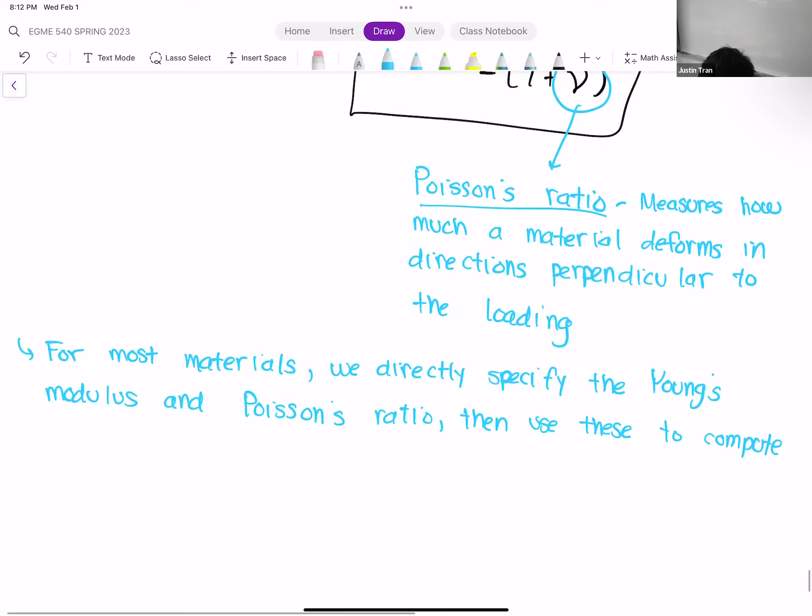One of the nice things about ANSYS is that it does this automatically. On the activity next Wednesday, we're going to create our own custom material, and I'll show you how to make a custom material in ANSYS. You'll see that the only things we specify are the Young's modulus and the Poisson's ratio, and the entry for the shear modulus will populate automatically based on those two.